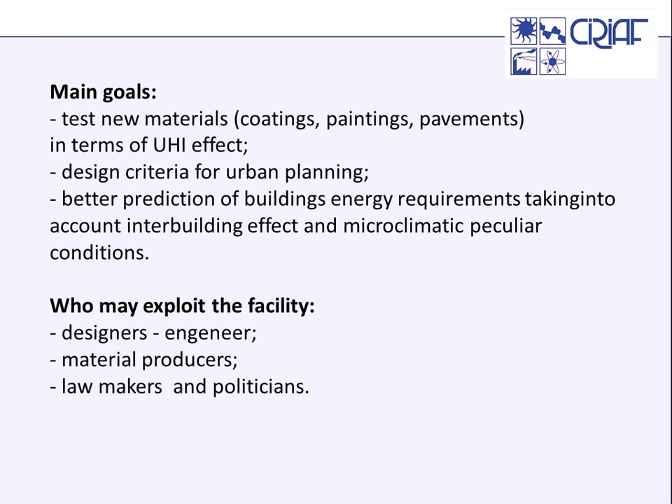So let's take a look at the experimental facilities, and the analogies that we used to use the experimental facilities for representing a real scenario. Let's talk about the theoretical model, and about the baseline analysis, which allowed us to verify the effectiveness and the workability of the experimental facilities too. Then let's also take a look at the next steps that will be followed in order to use and to test the experimental and the theoretical model that we have presented here.

How do all these things work together, that is to say, how may the experimental facilities, the theoretical model, and a real scenario, which is constituted by materials, by urban area characteristics and so on, work together? The real scenario may be tested and simulated directly by the experimental facilities through some mechanical analogies.

Mechanical analogies allow us to reduce the dimension of the measurement device with respect to the real one, in order to measure the behavior of the real one itself. For example, when natural convection is considered, the ratio between the model length and the real scenario one is determined by the ratio of the temperatures that may be achieved in the model itself and that are usually achieved in the real scenario. In this way, we need to control, to drive the difference of temperature on the experimental facilities in order to control also the ratio between L model and L.

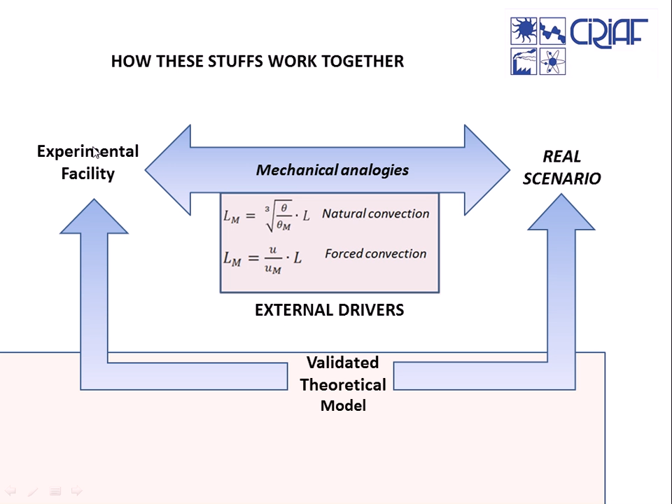In this case, a new material may be proved, may be tested in the experimental facility, may be validated on the theoretical model, and so the effect of this material may also be estimated with a theoretical and experimental combined methodology in the real scenario.

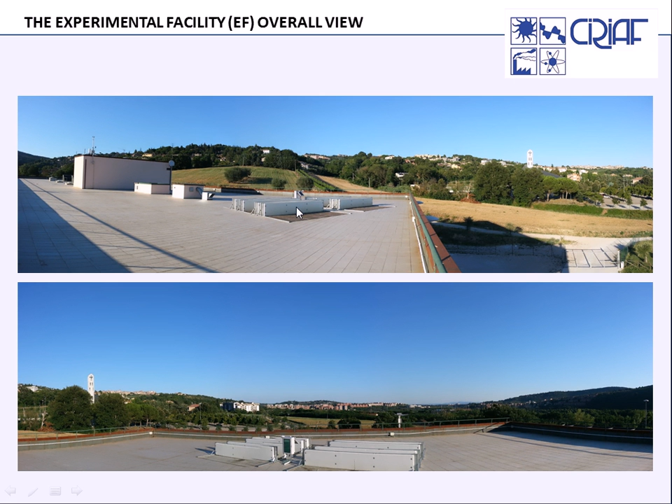Here is the experimental facility, which is located on the roof of a building of our university. As you can see, the experimental facility is composed of two equal arrays, which may be seen better in the next pictures. Here is a closer picture.

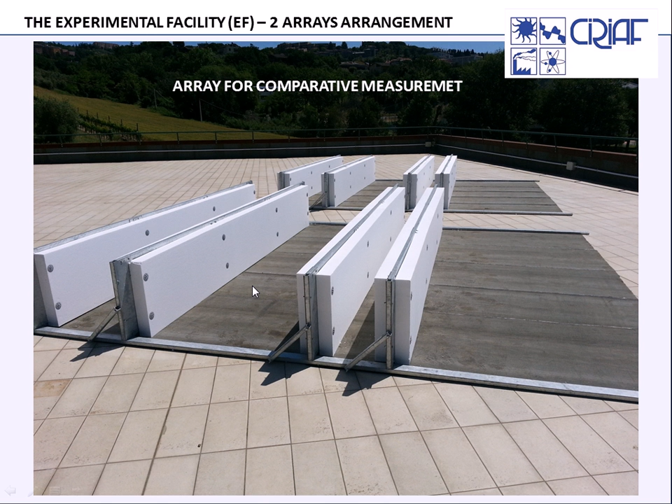You can see the two arrays; each array is composed of a pavement-like surface and wall-like surfaces. The arrays are exactly the same as one another in order to reproduce the exact condition in one and in the other. In this way, a comparative measurement may be done between several materials and between different conditions in terms of materials and wall positions.

The experimental facility is composed of many frames, and each wall is perfectly insulated by an insulating material in order to reduce the conductive interference between one wall and the other. Actually, the ratio between the height and the width of each canyon has been set at 0.5, 1 and 2, which is more or less typical of real conditions. Anyway, this ratio is adjustable and may be set for any application.

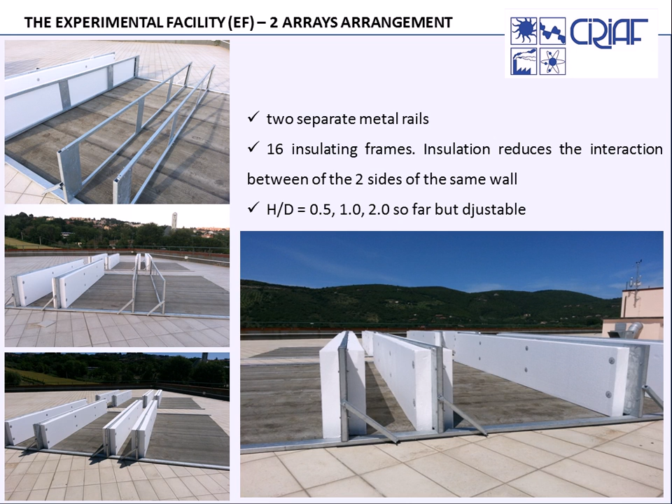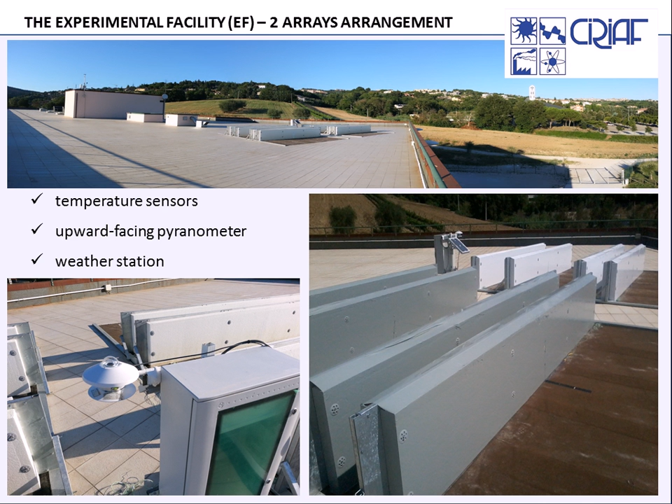The system, the experimental facility, has been equipped with a temperature sensor, with upward-facing pyranometers, and with a weather station in order to control and measure also the wind velocity and the air temperature.

The experimental facility has also been equipped with a lot of thermocouples, that is to say temperature measurement points, which are located in the patterns that we can see in this figure. In this way, we can measure in both arrays the temperature exactly at the same point, at the same position with respect to sun radiation and with respect to the position of the walls. The number of thermocouples is 48. In this way, we think we have a good representation of temperature distribution all over the two arrays.

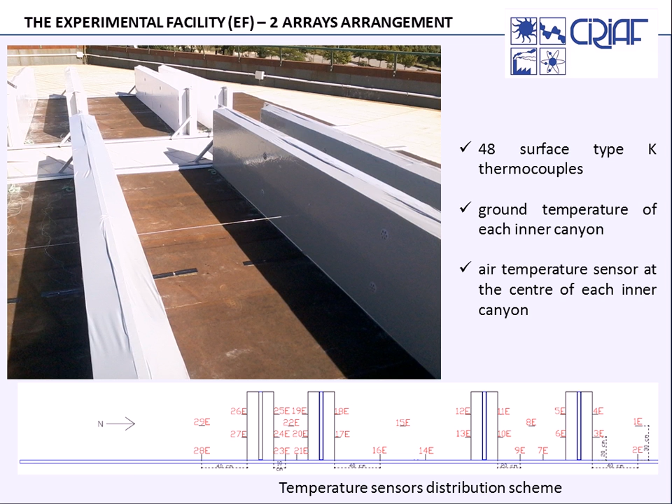When the direct representation of real scenario is considered, we need to adopt a mechanical analogy, as I previously anticipated. In this way, the ratio between the real scenario height and the measurement facility height is limited by this ratio. For that, the difference of temperature that may be achieved in the experimental facility must be controlled and must be set higher than the natural difference of temperature which may be measured in the real scenario.

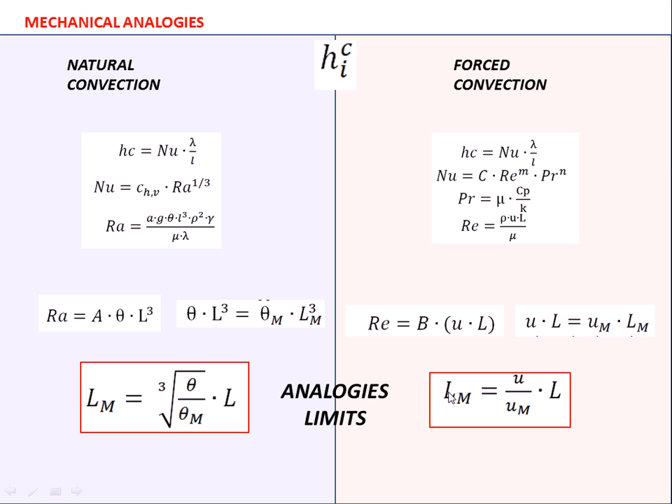Even for forced convection, these limits limit the ratio between the length of the walls in the experimental facility with respect to the length of the walls in the real scenarios. In this way, for natural convection, we need to use an external wind protection in order to reduce or to neglect the interference between the external wind and the natural convection which would occur inside the canyons. And we also need a warming plate which will be installed in the pavement. The warming plate allows us to get a proper difference of temperature in order to determine the ratio between Lm and L.

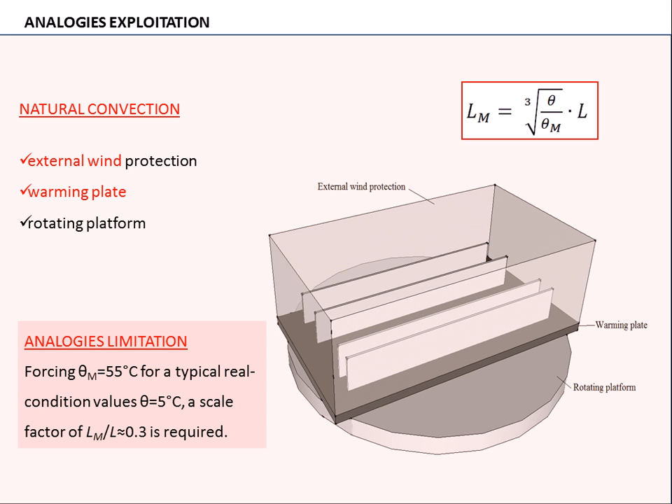If we make an example, we can say that if we get a difference of temperature of 55 Celsius degrees, which would describe a real condition of 5 degrees difference of temperature, a scale factor of 0.3 is required. As you can see, this fact is a very strong limit, because if you want to reproduce the behavior of a 10 meters high wall, you need a 3 meters high wall in the experimental facilities, and it is really very hard and tough to be realized.

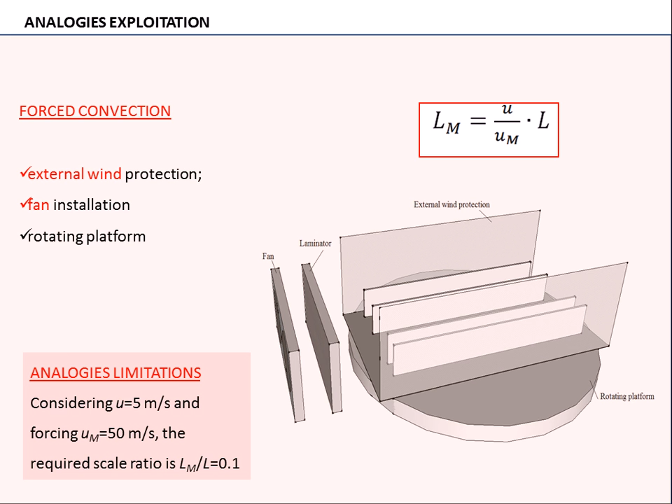A similar situation occurs when forced convection is considered. In this case, external wind protection shield is also used, but a fan must be used to reproduce a wind velocity in order to control the ratio between Lm and L, which is equal to the ratio between the velocity of the real scenario and the velocity of the air in the model. For example, if we consider a velocity of 5 meters per second in the real scenario, forcing a velocity of 50 meters per second, a ratio factor of 0.1 is achieved. It means that a wall as long as 10 meters may be represented in the experimental facility by a wall as long as 1 meter. Even such a limit, even if it is a little bit less compulsory than the previous one, reduces a lot the applicability of the experimental facility itself.

Anyway, we did a first measurement campaign in order to get a calibration of the two arrays, and this calibration procedure has been achieved from July 24th to July 29th in 2013 in order to assess the thermal equivalence between array 1 and array 2 equipped with the same materials. In this way we can test whether the two arrays behave in the same way. Data have been registered each 10 minutes, and the result may be summarized in this way. Average difference between homologous sensors is 0.45 Celsius degrees for the entire data set, and 0.05 Celsius degrees considering only nighttime data set. The maximum difference from a single thermocouple is 1.1 Celsius degrees.

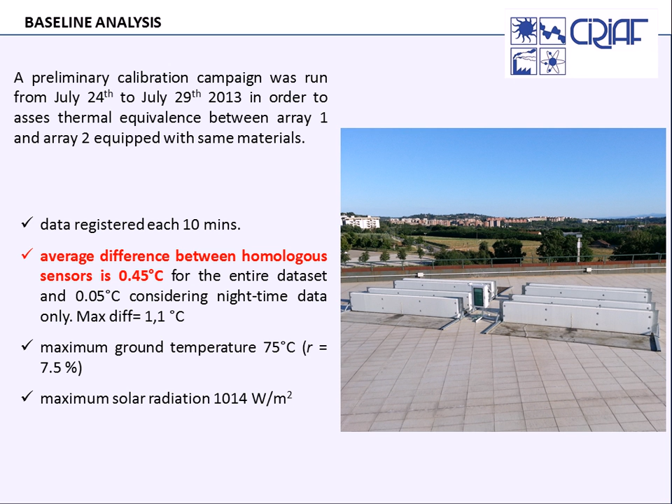Maximum ground temperature has been measured as 75 Celsius degrees with a reflectance of 7.5%. Maximum solar radiation has been measured as 1014 watts per square meter. The maximum temperature and maximum solar radiation condition has been the one in which the maximum difference on temperature has been measured in the thermocouples.

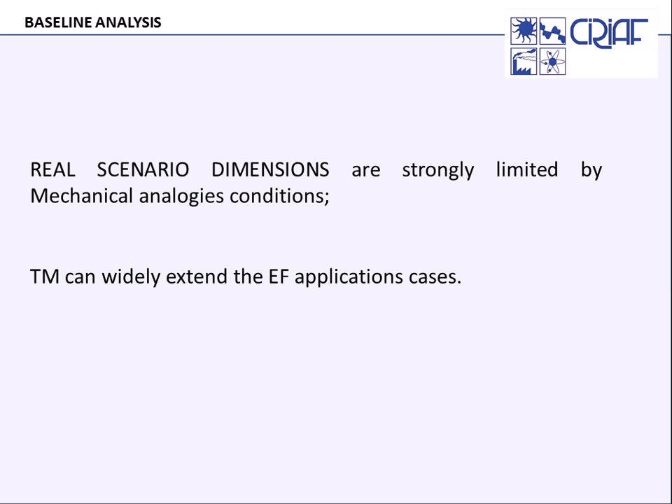As we have seen before, the real scenario dimensions are strongly limited by mechanical analogy conditions. And so a theoretical model has been introduced in order to widely extend the experimental facility application cases. In this way, any canyon of the experimental facility, or anyway of the real scenario, has been modeled as a cavity in which a radiative balance of energy has been done. In particular, material has been considered to behave in the same way in the visible and in the same way in the infrared. That is to say that, for example, the reflectance of a material has been considered homogeneous in the visible and homogeneous in the infrared, but anyway different in the visible and the infrared.

Then a visible energy balance has been written down, and also an infrared energy balance has been written down. So the two balances have been put together in a global energy balance in which the convection coefficient has also been taken into account. Obviously, the coefficient is different with respect to each of the several surfaces which have been taken into account. Such a coefficient may be used as an analogy coefficient when analogy has been taken into account, and as the real coefficient when the measurement and the theoretical model have been applied to the real scenario, or anyway to the experimental facility.

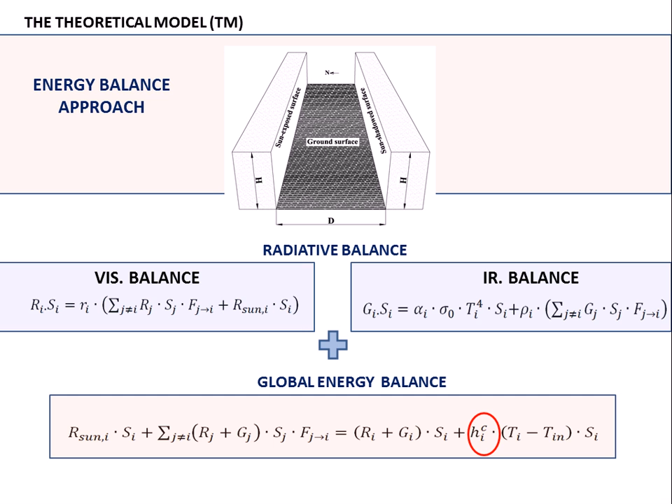By the usage of the theoretical model together with the real scenario, new materials may be tested, and the next step that we are going to do is to test new retroreflecting materials, which may be really very interesting for urban heat island mitigation. In this way, also the theoretical model validation will be possible and will be applied to very innovative materials.

In order to let you know how a retroreflecting material may be important for tackling the urban heat island phenomenon, I remind that recently in London a walkie-talkie tower burned a car by reflecting down sunbeams. You may know that reflection, especially in glass surfaces, occurs both in a diffusive way and in a specular way. When a retroreflecting material is applied, reflection occurs in the same direction of incident light. In this way, sunlight beams may never go down to the streets, but are reflected upwards in the same direction as they come. And probably if a retroreflecting material had been used in this tower, no burning phenomena would have occurred.